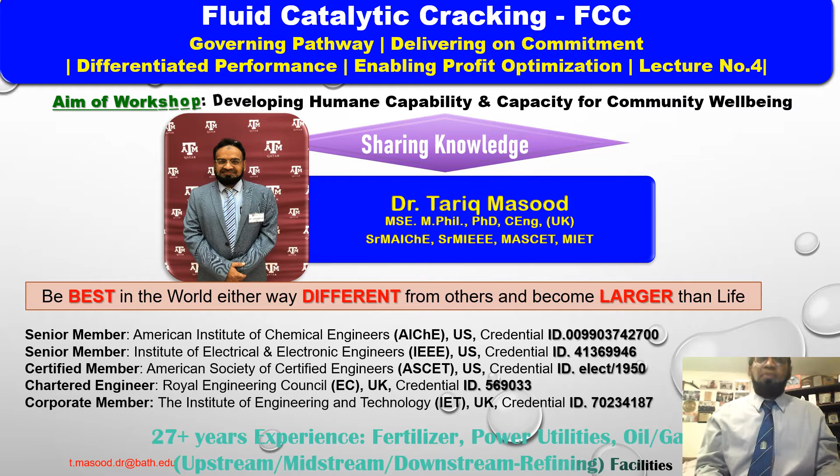Before my lecture, I used to read a Quranic verse. Kala Rabbi Shirali Sadri wa Yassarli Amri Wahlalu Uqdatam min lisani Yafqahu qawli. O my Lord, open my chest and ease my task for me, and loose a knot from my tongue that they may understand my saying. Allahumma Rabbi Zidni ilma. O Allah, advance me in my knowledge and true understanding.

Fluid catalytic cracking, FCC unit, lecture number 4: theoretical descriptions of the FCC unit. Today we are going to discuss the main column section. We have already discussed reactor severity, regenerator severity, and feedstock quality in my lecture numbers 1, 2, and 3. You can explore more about it in my earlier three lectures on the FCC unit.

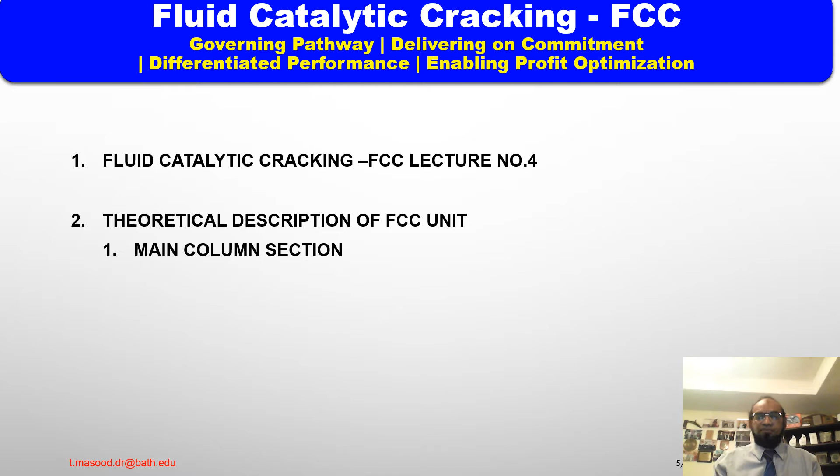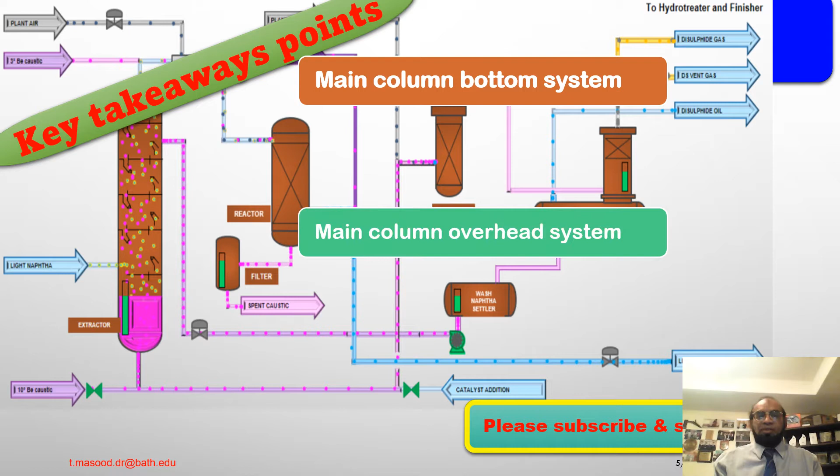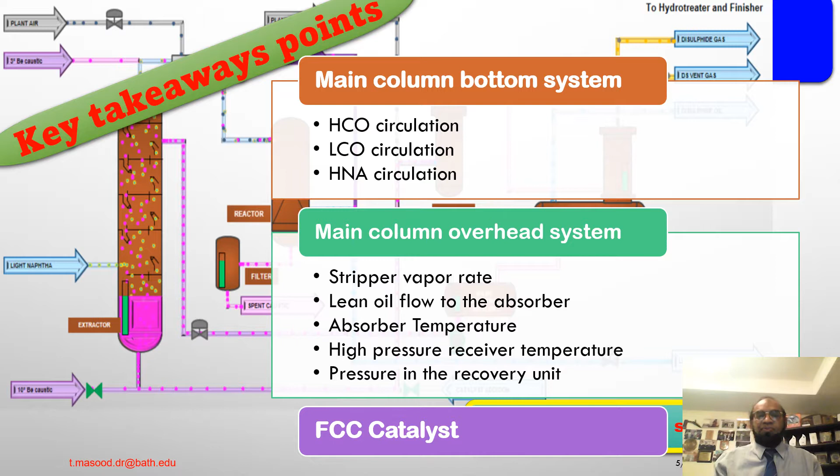Key takeaway points from lecture number 4 on the FCC unit: first, we are going to discuss the main column bottom system, main column overhead systems, and then FCC catalyst. In the main column bottom system, we will shed light on HCO circulation, LCO circulation, and HNA circulation and their systems, product quality systems, stripper vapor rate, lean oil flow to the absorber temperature, high pressure receiver temperature, and pressure in the recovery unit.

Main column section variables: the main column section is equipped with circulating streams and heat exchangers. These are used to remove excess amount of heat from the main column and provide the internal reflux necessary for the fractionation. The heat exchange of several of these streams is fixed by the heating duties of the gas concentration section equipment. Any change in the heat removal rate in one section of the main column is compensated for in another. For example, if the heat removal in the circulating heavy naphtha circuit is increased, the column top reflux will automatically decrease since it is temperature controlled.

Product compositions are affected by the column internal reflux rates. These are changed by adjusting the top temperature or the side cut product draw rates. An increase in the top temperature or product draw will decrease the internal reflux below the draw, allowing heavy vapor to rise and thus produce a higher end point product. Quality improvement in the fractionation between streams can be obtained by increasing the internal reflux in the section of the tower between the two draw-offs. Since the composition is a function of temperature and pressure, monitoring draw tray temperature is an excellent method of watching for changes in the reactor and main column operation.

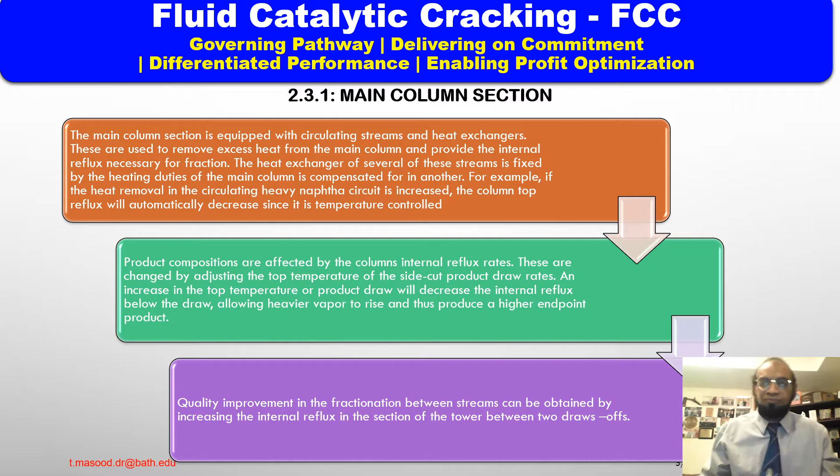Main column bottom system: what it demonstrates. The function of the bottom section of the main column is to desuperheat the reactor vapors, to condense the bottom product, and to scrub entrained catalyst from the reactor vapors. The reactor vapors are desuperheated by circulating a large volume of bottom materials over the lower trays, which are known as the disk and donut trays.

Steam generation is the most flexible form of heat removal from the main column bottoms. Increasing heat removal by increasing steam generation will decrease the amount of vapors rising up the column, and less overhead reflux will be required to maintain gasoline end point. The main column bottom's coking rate is a function of temperature and residence time under normal operating conditions. In circulating the main column bottoms, heat removal must be achieved to keep the bottom temperature below the maximum of 365 degrees Celsius.

Quench streams taken from the effluent side of the steam generations and returned below the disc and donut trays can be used to help cool the bottoms. Changes in reactor severity, charge stock composition, and charge rate may require an increase in quench rate to keep the bottoms temperature below 365 degrees Celsius. A hot bottoms spillback to the disc and donut stage is provided to maintain an adequate wash rate over the disc and donut trays when unit throughput is reduced. The spillback rate should be adjusted as necessary to maintain a minimum wash rate of 230 meters cubed per hour, approximately 120% of the feed rate.

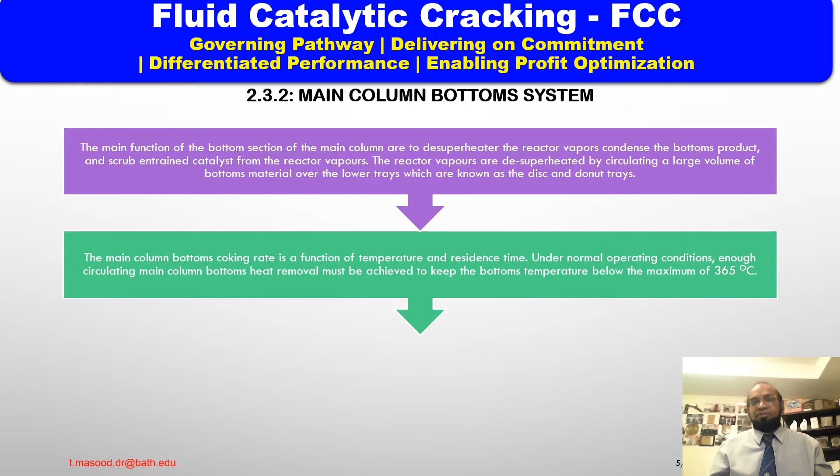Main column bottoms system.

The next topic is HCO circulation and product system. What this basically demonstrates is that heavy cycle oil circulation transfers heat to the gas concentration sections, debutanizer reboiler, the naphtha splitter lower reboiler, and in the main column sections to the heavy naphtha stripper reboiler.

Enough heat must be removed from the circulating HCO to produce sufficient internal reflux for the HCO section trays below the heavy cycle oil return. If the circulating rate is reduced relative to the reboiler loads, the quantity of internal reflux at the HCO section will decrease as more heat, in the form of uncondensed vapor, rises to the LCO section.

This shift in heat up the column continues until eventually either the top reflux rate automatically increases to balance the heat removal, or an increase in the circulating bottoms heat removal rate is made to compensate for the decrease in the heavy cycle oil heat removal rate. It is apparent that a change in the heat removal rate from one section of the column must be compensated for by a balancing change in heat removal from another section.

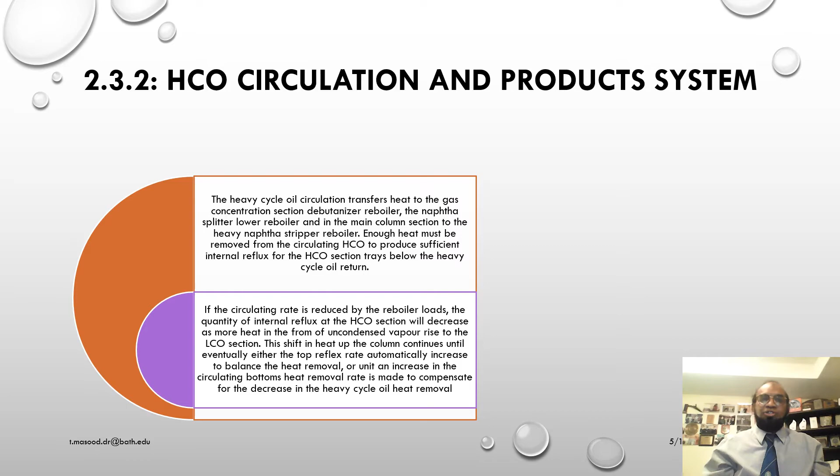Next, LCO circulation and product system.

Circulating light cycle oil transfers heat to the gas concentration sections, debutanizer feed exchanger, and the naphtha splitter upper reboiler. Its rate is determined by this exchanger's duty requirement and the sponge absorber lean oil flow rate.

Heat removal from the circulating stream produces internal reflux in the LCO section below the return, in a similar manner to that of the HCO return system. The light cycle oil product is drawn off and stripped in order to meet a flash point specification.

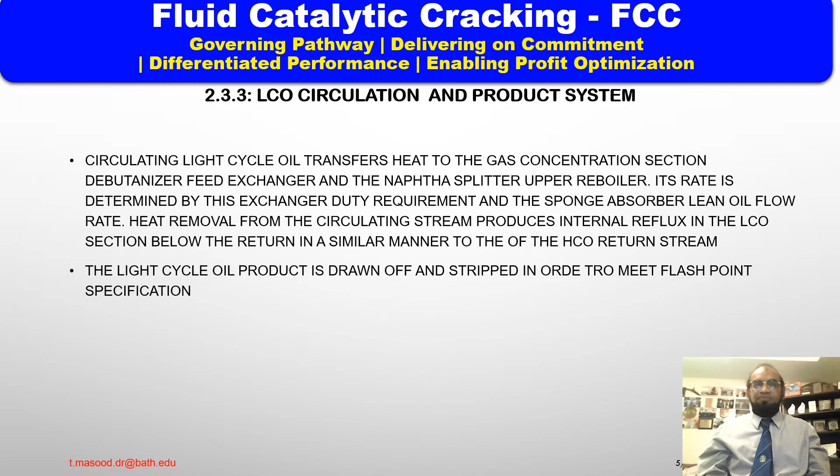Next topic is HNA circulation and product system.

Circulating heavy naphtha exchanges heat in the heavy naphtha raw oil exchanger before returning above the HNA draw tray to provide internal reflux in that section of the column. In case hot feed is processed in the FCC unit, the heavy naphtha raw oil exchanger requires reduced heat duty. This is compensated by air cooling of the circulating HNA in the heavy naphtha pump-around cooler. The HNA product, heavy naphtha product, is stripped in the heavy naphtha stripper to establish the vapor pressure.

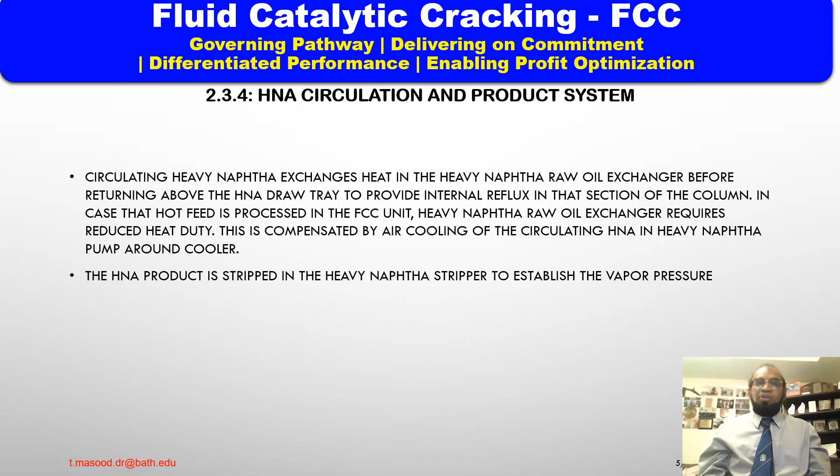Main column overhead systems. A substantial amount of main column heat removal is done by the overhead condensing system. The tower overhead vapor's temperature and pressure determine the end point of the overhead naphtha product.

This overhead temperature resets the top reflux flow rate control to maintain the desired unstabilized naphtha endpoint. The reflux stream comes from the main column reflux drum. Column pressure is maintained by controlling the column receiver pressure.

An overpressure vent to flare is used on startup and in emergencies when the wet gas compressor in the gas concentration unit cannot handle the gas load. The overpressure vent valve is controlled by an independent pressure control valve, typically set at approximately 0.035 bar G above the controlling pressure set point. The pressure is normally controlled by the wet gas compressor in the gas concentration unit. A signal is sent from a second pressure transmitter on the main column receiver to the wet gas compressor control system to maintain the desired pressure.

Next is the gas concentration section variables. The purpose of the gas concentration section is to maximize LPG, that is C3, C4 recovery, while minimizing H2S contamination. The unit is controlled by observing the C3 content of the lean gas from the sponge absorber and the H2S content of the LPG stream. In practice, as the C3 content of the lean gas increases, the H2S content of the LPG stream decreases, and vice versa.

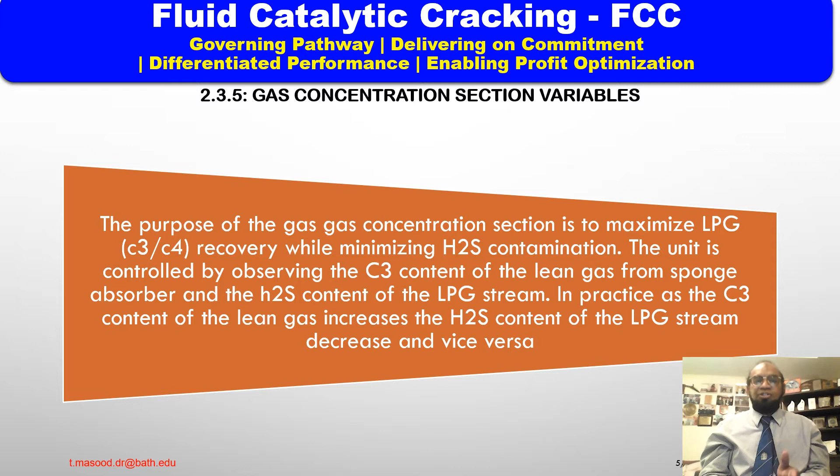Next is the stripper vapor rate, part of the gas concentration section variables. A stripper variable, first being the stripper vapor rate.

The flow control in the stripper overhead vapor line is the primary control in the recovery part of the gas concentration section. Normally, all other variables are held constant, and this vapor rate is varied to control the H2S content of the LPG stream. The stripper vapor rate controls the flow of steam through the stripper reboiler tubes; increasing the stripper vapor flow decreases the H2S content in the stripper bottoms, but will increase the propylene and propane content of the lean gas from the sponge absorber. The vapor flow should be adjusted to give a minimum content of H2S in the debutanizer's overhead with minimal content of propylene and propane in the sponge absorber off-gas.

It is possible to build up a liquid cycle in the stripper and overload it with liquid. For example, should the stripping rate become excessive, the stripper vapor will contain heavier than desired components which end up as liquid in the high pressure vessel. This will increase the feed rate to the stripper and increase the liquid load, and consequently the pressure drop across the column. These conditions tend to increase liquid entrainment back to the high pressure receiver, magnifying the problem.

A sudden increase in the hydrogen sulfide level of the LPG stream should not be construed as being a result of lower stripping alone. For example, if the sulfur content of the FCC unit charge increases, the H2S content of all the streams will increase roughly in that proportion. On the other hand, if the H2S of the LPG stream is held constant by changing stripping rate, the propane content of the lean gas will increase.

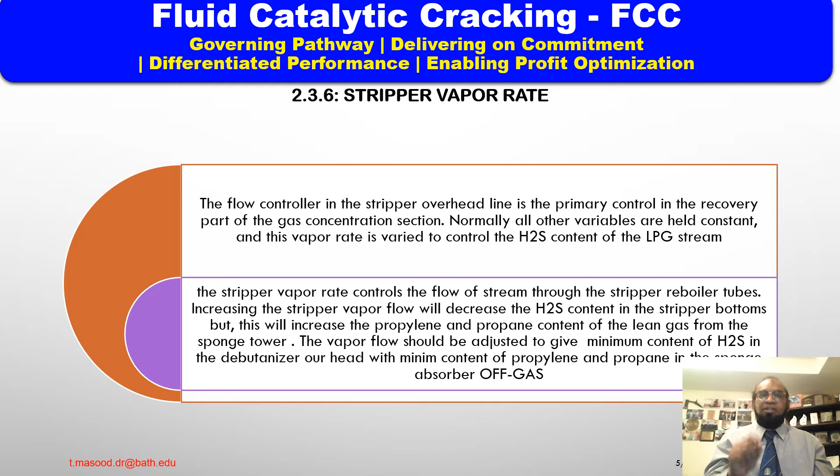Next is lean oil flow to the absorber, first being the primary absorber. Lean oil flow from the main column is not a variable that operators can control. Recycled naphtha from the debutanizer's bottoms can be adjusted to increase C3, C4 recoveries. However, caution must be exercised to avoid liquid flooding at high throughputs for all absorbers.

Second is the sponge absorber. Increasing the sponge oil flow rate tends to increase the absorption efficiency of the sponge absorber. Changes in sponge oil flow rates have only a slight effect on C3 recovery, but the effect is more noticeable on the recovery of heavier components.

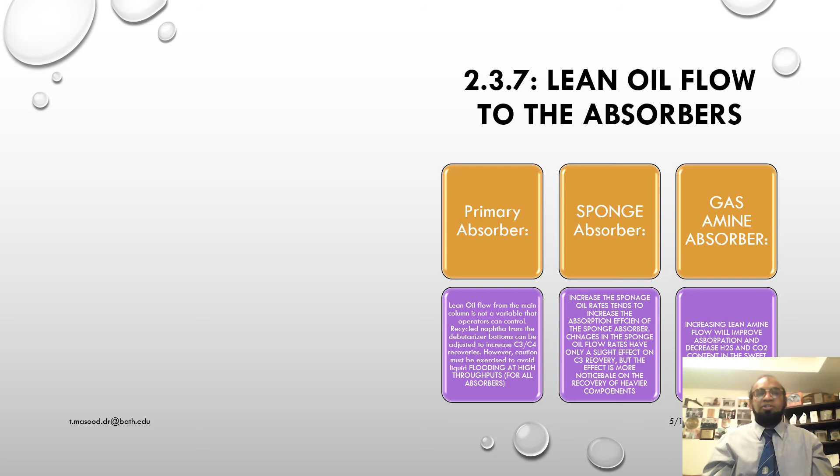Third is the gas amine absorber. Increasing the lean amine flow will improve absorption and decrease H2S and CO2 content in the sweet gas. Next is absorber temperature.

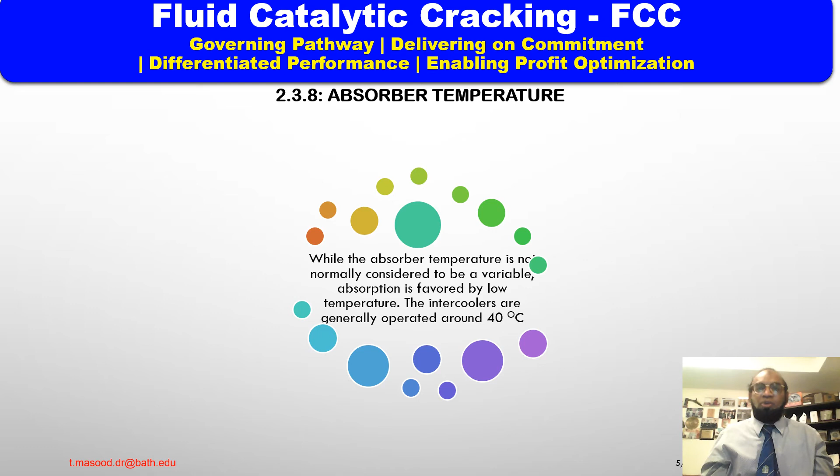Absorber temperature. While the absorber temperature is not normally considered to be variable, absorption is favored by low temperatures. The intercoolers are generally operated around 40 degrees Celsius.

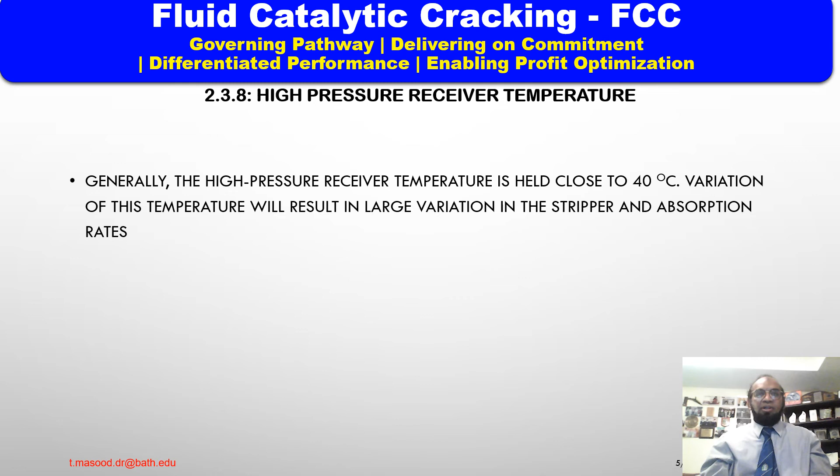High pressure receiver temperature. Generally, the high pressure receiver temperature is held close to 40 degrees Celsius. Variations of this temperature will result in a large variation in the stripping and absorption rates.

Pressure in the recovery part. The gas amine absorber pressure control maintains a constant pressure on all vessels in the gas concentration unit, except the debutanizers and naphtha splitter. The system pressure is a secondary control which, though normally not used for day-to-day operations, can be used to keep the necessary stripper vapor rate in the convenient range.

It may sometimes be desirable to lower the system pressure when the cracking unit swings to a high sulfur charge stock. The system pressure must always be high enough to charge the debutanizers.

Next, we are going to discuss the FCC catalyst management system.

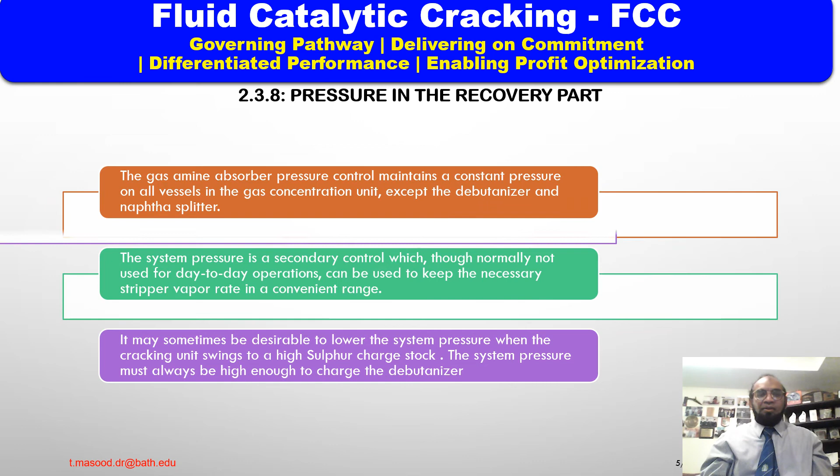FCC catalyst is a fine powder, generally smaller than most refinery catalysts. Its particle size distribution is in the 10 to 130 micron range. Through the use of fluidization media such as air, hydrocarbon vapors, or steam, the catalyst fluidizing media mixtures can be made to behave as a liquid.

Fluidized catalyst can assume a level surface similar to that of a liquid, as it does in the reactor and regenerator. It can be made to flow through a pipe, as in the case of standpipes and reactor risers. In essence, it is like liquid. It is the principle that permits the circulation of catalyst between the reactor and regenerator.

FCC catalysts used today are composed primarily of the oxides of silicon and aluminum. Other elements are often present, including sodium, calcium, magnesium, and members of the rare earth family such as lanthanum and cerium.

The source of catalyst activity is an acid site, which enables the catalyst to crack the large oil molecules selectively to lighter material. FCC catalyst has a regular zeolite structure.

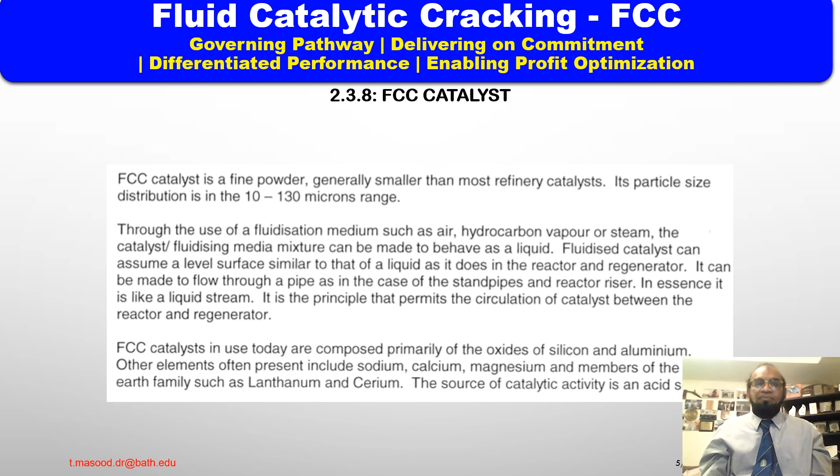Beta cages are cavities created within the sodalite unit. Alpha cages are the cavities resulting from interconnecting sodalite units. Typical fresh FCC catalyst specifications I'm going to discuss on my next slide.

Typical fresh FCC catalyst specification. First chemical properties, then we'll discuss physical properties. Chemical properties: aluminum oxide 17 weight percent, sodium oxide 0.3 weight percent, and rare earth oxide 2.7 weight percent.

Physical properties: surface area 300, pore volume 0.43, apparent bulk density ABD 0.74, average particle size APS is 70 micron, and microactivity is 79.

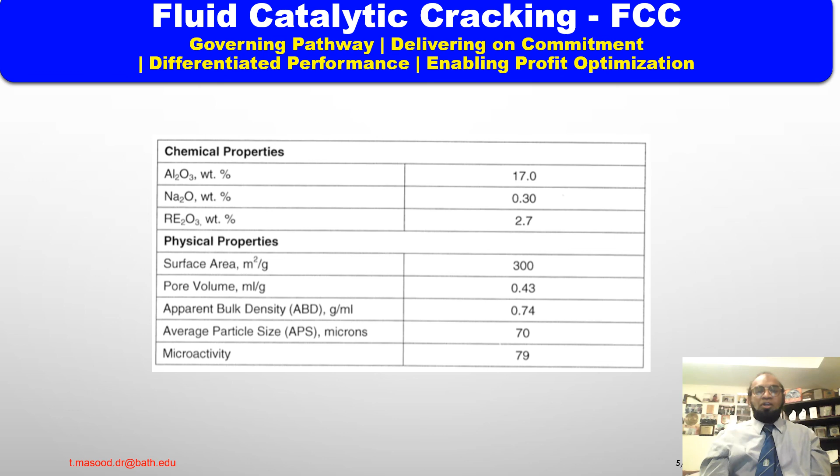Conclusion. Today we have discussed the main column bottoms and main column overhead system and FCC catalyst. In the main column bottom we discussed HCO circulation, heavy cycle oil, light cycle oil, heavy naphtha circulation and product systems. Later we discussed the main column overhead system, stripper vapor rate, lean oil flow to the absorber, temperatures, pressures, and pressure in the recovery unit. And then we discussed FCC catalyst.

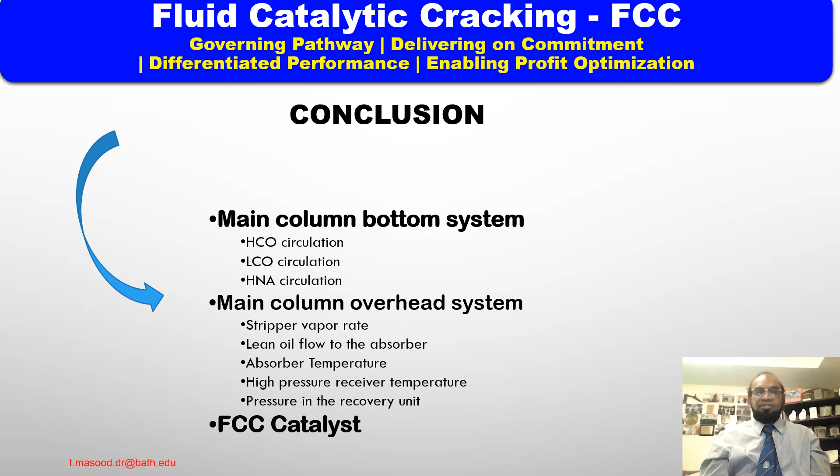Next topic, unit process description, very soon.